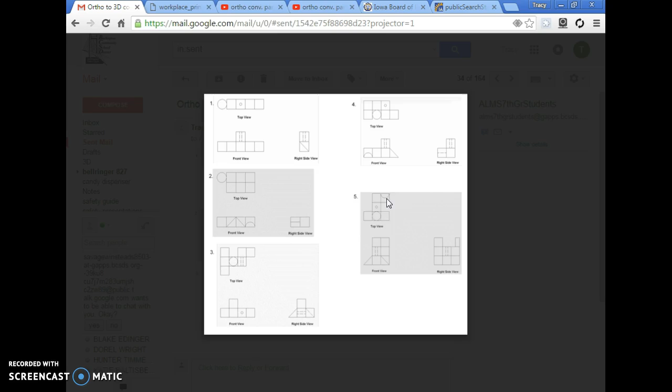So let's get this thing started and see how it goes. Hopefully I don't mess up myself. I'm going to go to Inventor on the desktop. It's early morning, so I don't already have it open. Give it a moment to do that, and then we'll start making our parts.

I believe we have 3 cubes going on the base, and they're going to go front to back. So we'll start out that way. I'll go New, Standard IPT, Create.

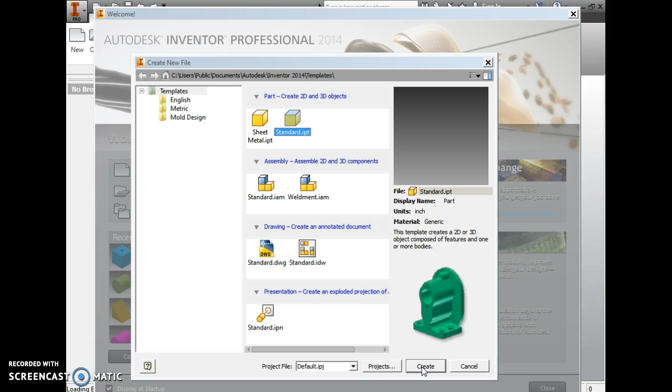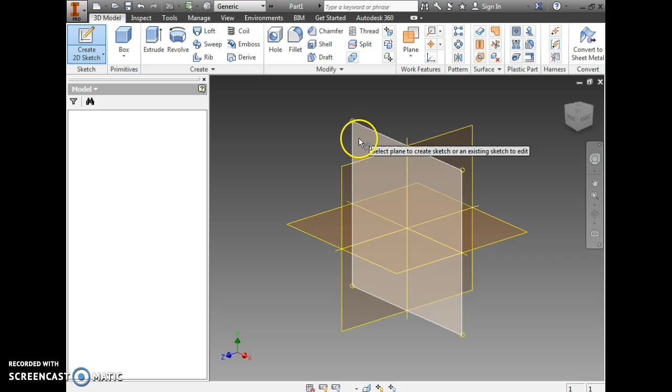We also have 2 triangles coming off the sides of the front view, and they look like they're on the very front of the object. So we'll try and make this proportionally correct to the sides. I'm going to go Pencil, Front View. We'll start with 3 boxes, 1 box at a time. Center, 1, Enter. Little house. Finish sketch, extrude, 1, Enter.

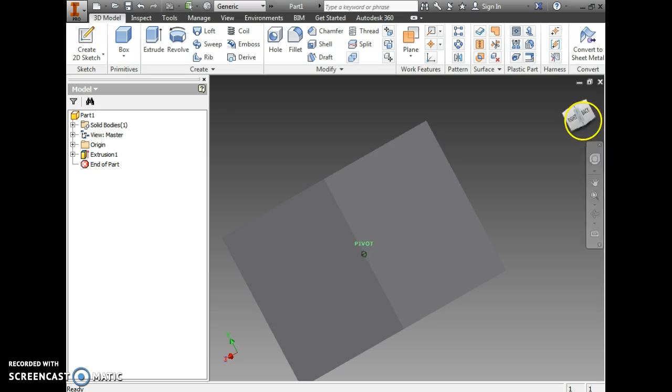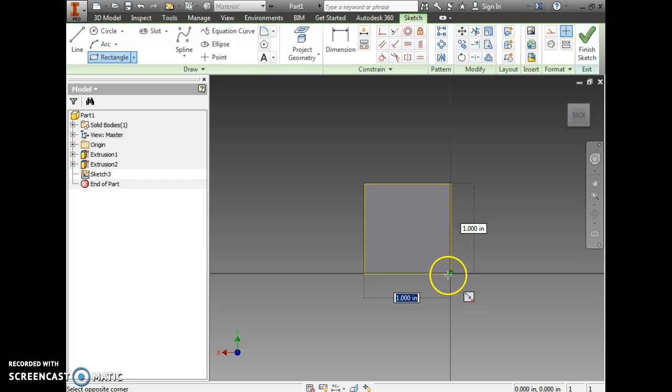Okay, so I'm going to bring these blocks to the back. I'll swing around it, click on the back of my object, rectangle, corner to corner, finish sketch, extrude, and it comes off the back. I'm going to stay on the back there, pencil, click on the box, rectangle, corner to corner. Remember, it's coming out the back. So finish sketch.

Little house, that'll swing it around so it's back to the front now. Then I can see my extrusion come out the back. Check that, that looks okay. So it's 3 wide, front to back.

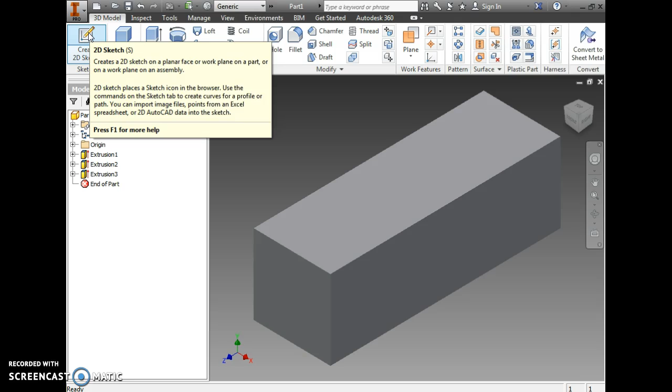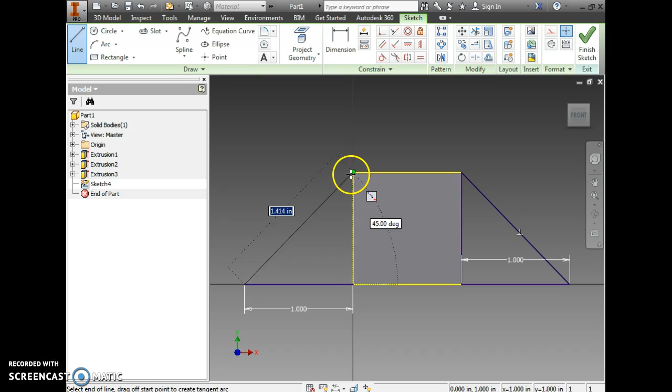Let's put the 2 triangles in the front. We're going to try and do this in 1 step, let's see how it goes. Click on the pencil, click on the front plane. I'm going to do a horizontal line, come straight out at 1 inch, swing it up as a triangle, swing it back down. Do the same thing over here on the left: horizontal line is 1 inch, we're going to swing it up and back down.

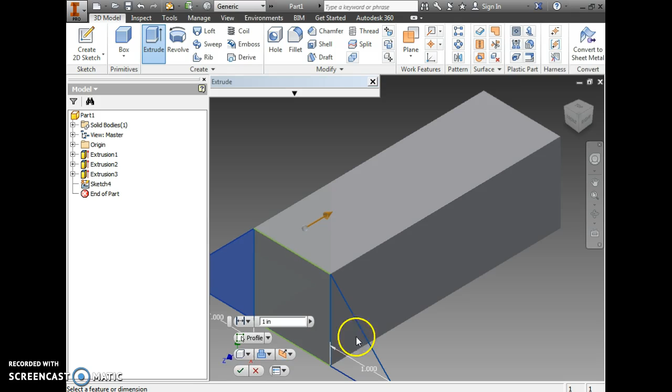Let's see if they will extrude together. See how my luck goes this morning. Extrude. That needs to be direction 2, that swings that triangle back. And it's not going to let me do it, is it? It didn't want to play nice this morning.

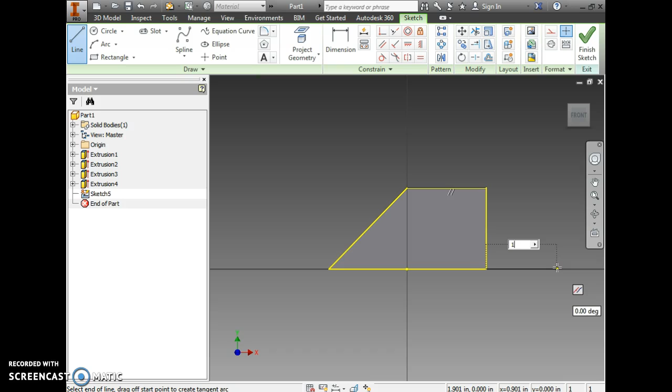So I'm going to go back and do my other triangle. Sometimes I can get it to do both at the same time. So I have it on one side, I'm going to do it on the other side. The program is not always consistent, and that's really weird. We saw that the other day when I extruded that hole out, constrained it at 1 inch, did a further extrusion, and it was 2 inches deep.

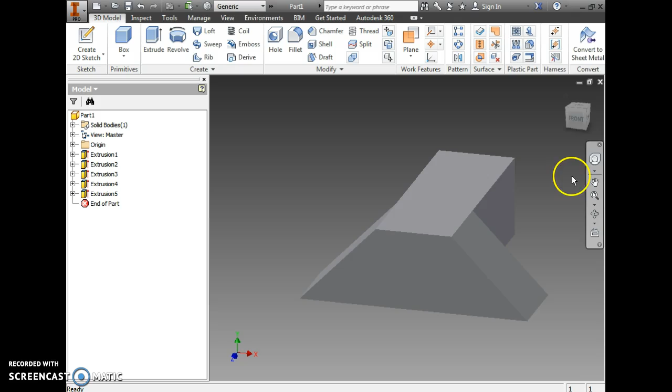All right, go extrude, goes forward, we're going to make it go back. Okay, so here's the base of our object. There's going to be a cube coming out this side. Let's go ahead and make this whole base because there's going to be a cube stacked on a cube with a half cylinder on top of it.

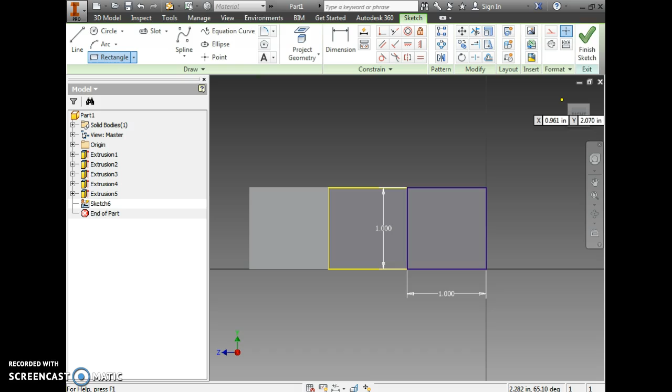That way, tab 1, enter, finish sketch, extrude, out the side. And we're going to check that.

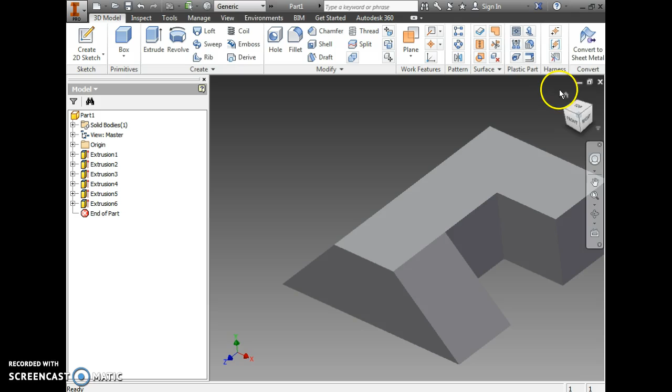Okay, we're going to have a cube on top of there. Let's get a good view at that. Pencil. Click right there. Rectangle. Corner to corner. Finish sketch. We're going to extrude this one up.

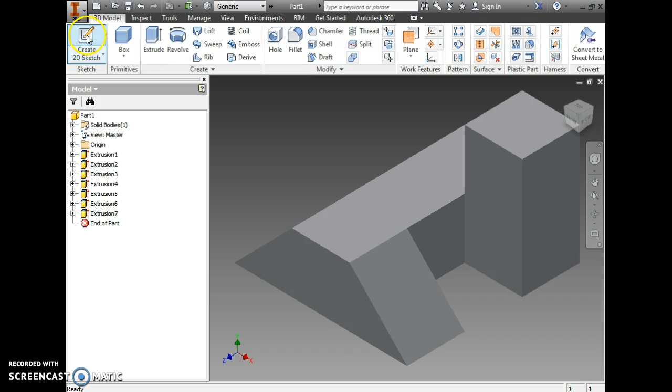And that's going to have a half cylinder up here. So pencil. Click on that. Make sure we're set to 3-point arc. We're going to go endpoint to endpoint.

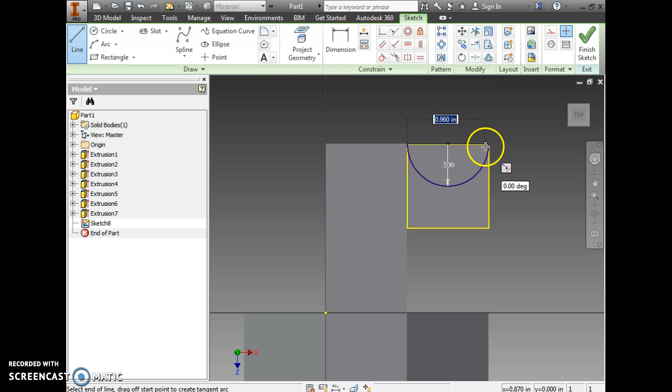0.5. Close it with a line so we have the profile. Finish sketch. Extrude that up.

Okay, we now have our 3 layers with that tab. We're going to have a cube here with a cylinder on top of that, so we'll go pencil. We'll click right there. Rectangle.

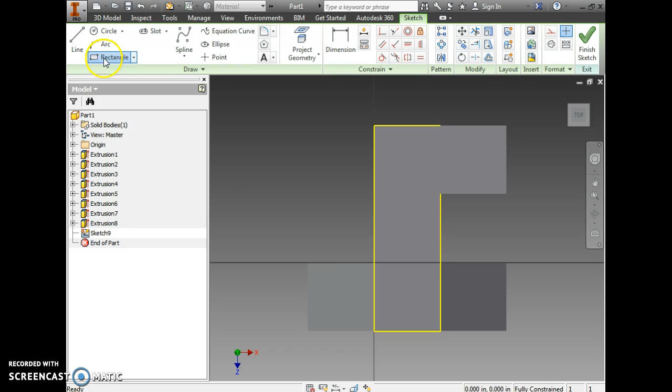Make sure it's 1 by 1. Little house. Finish sketch. Extrude. Pop that one right up. We'll check that.

And there's going to be a cylinder on top of that. So pencil, click on top of that.

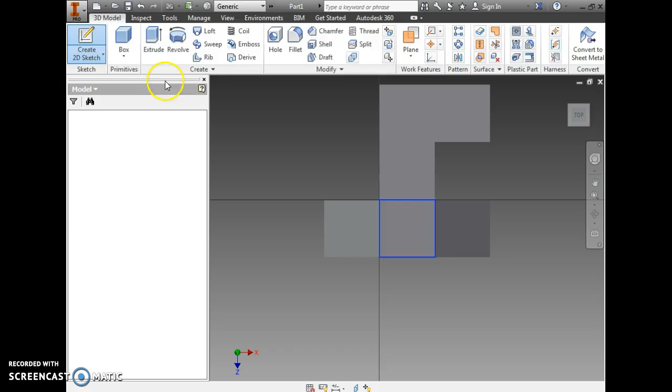Go circle, watch for your guidelines so you know you have it centered, 1-inch diameter, little house, finish sketch, we'll extrude that up.

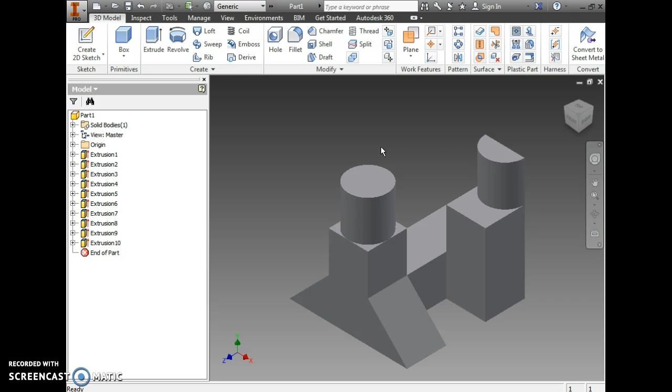Then right here in the middle is going to be a cube with a hole in it. That might be our last part. We'll have to analyze this real good once we get it done.

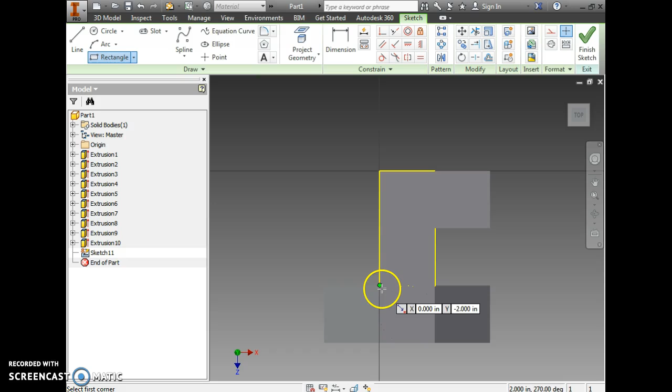Pencil. Look right there. We'll go rectangle. Do that corner there. That corner there. Make sure it says 1 by 1. Check that. Little house. Finish sketch.

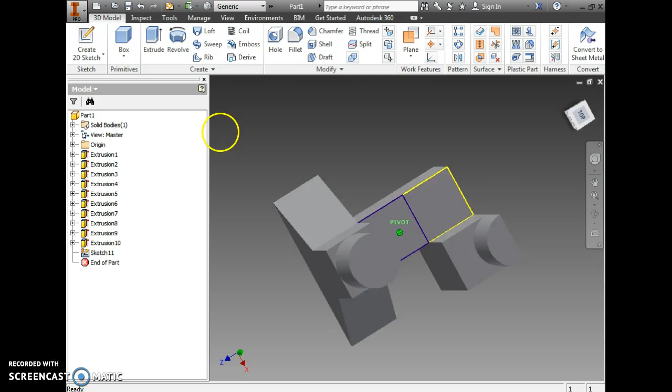Glitchy and not let me click on it. What went wrong? We get this sometimes. I'm going to work my way around that though.

Well, maybe I need to click on extrude. Ha! Good morning. Okay, check that.

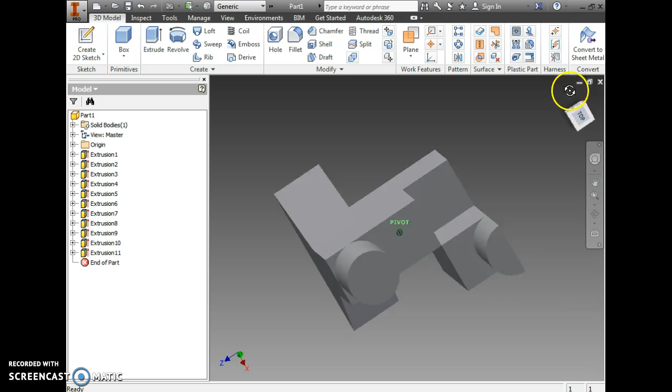And it gets a point right in the middle of that for the hole. Click on that. We're going to go to point. Okay, it is not going to give us, see how it goes down there, so we're not going to get the right center.

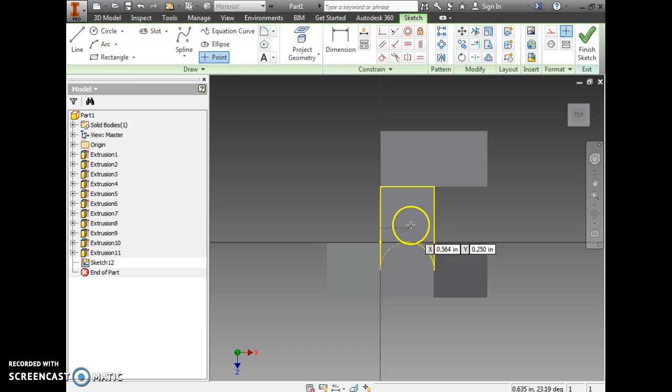We get this vertical center, we're not getting the right horizontal center, so we're going to have to constrain that with a dimension.

So I'll place my point, I'll go to dimension, and this should be 0.5. Finish sketch.

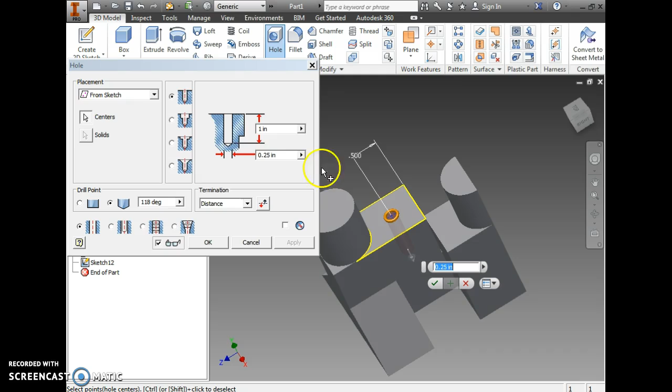We're going to go to the hole tool, 1/4 inch, depth is 1 inch. I'm good with that.

Alright, so we're going to look and see if this is done. I'm going to go to my front view and compare it to my handout. And see, 3 blocks wide, 3 tall on the right.

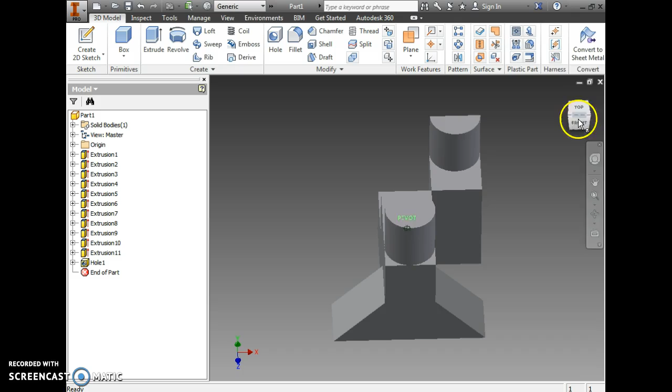That looks good. Go to my top view. 3 wide, narrow in the middle, 2 out the back, and I'll go to my right side view.

3 tall on the right, 3 tall on the left, 2 in the middle.

Like I got this. So we'll give it a pretty color.

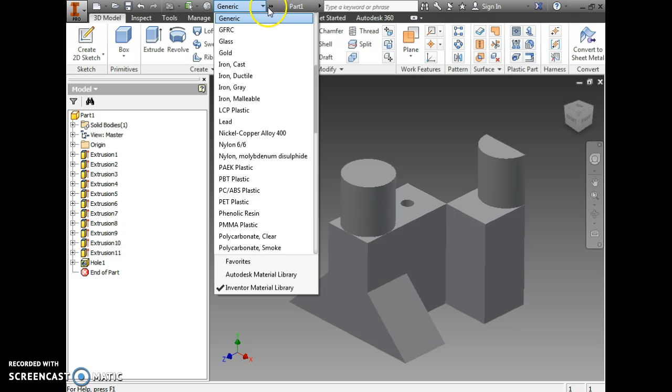Let's see. Whoop. Moving slow. Indoor pool.

All right, indoor pool. No, I don't like indoor pool at all.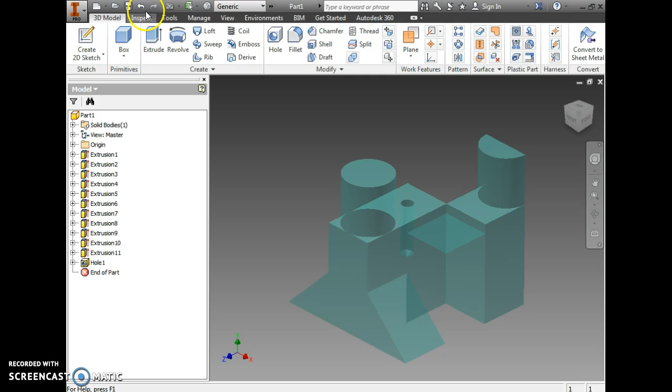All right. Light red.

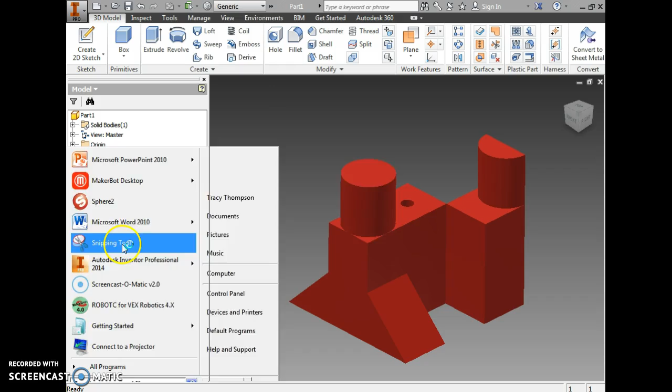Okay. So now we'll go to our snipping tool. It's kind of a big one, so you got to make sure it fits in your box.

Edit, copy. We'll go to our PowerPoint. Down here, new slide. This will be part 5.

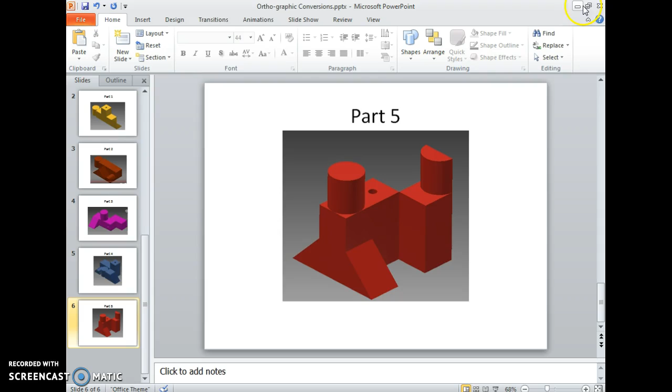There we go. I have finished my PowerPoint. I am ready to turn that in. Hopefully, you will have the same good luck that I did.